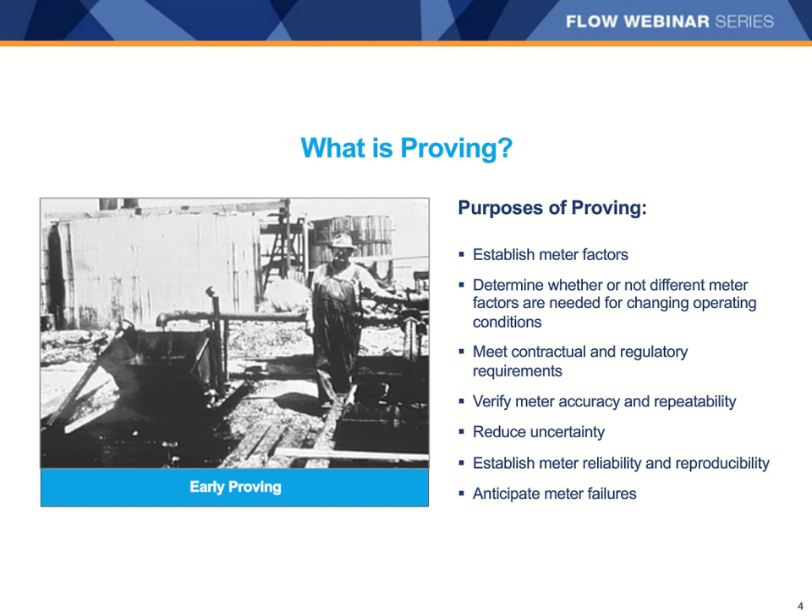Normally, financial risk is the main factor that decides how often proving must be done. Therefore, the value and quantity of the product that is flowing determines how often proving is done. In cases where the flow rate is high and/or the product is expensive, proving might be done before and after each and every transaction.

Take, for example, the estimates shown in the table that show 0.1% of measuring accuracy can be worth thousands of dollars per day. The table also shows it only takes 20 or 30 minutes for an amount of crude oil equal in value to the cost of a large Coriolis meter to flow through the meter.

In other applications where the value of the product measured is smaller, proving might be done less frequently, perhaps monthly, to avoid wearing out the prover too quickly. Some applications are scheduled to prove whenever a certain fixed amount of throughput has passed through the meter. Another factor that might impact this decision is the type of meter and whether it wears out quickly or not.

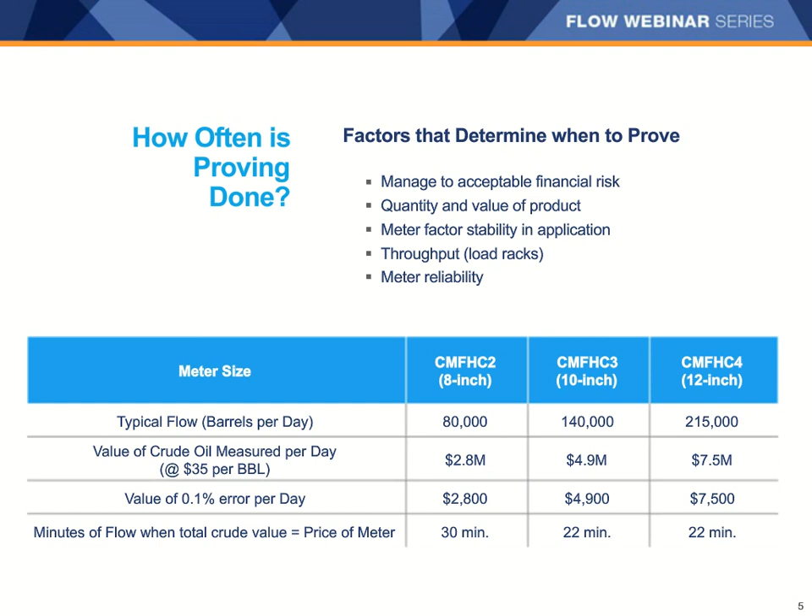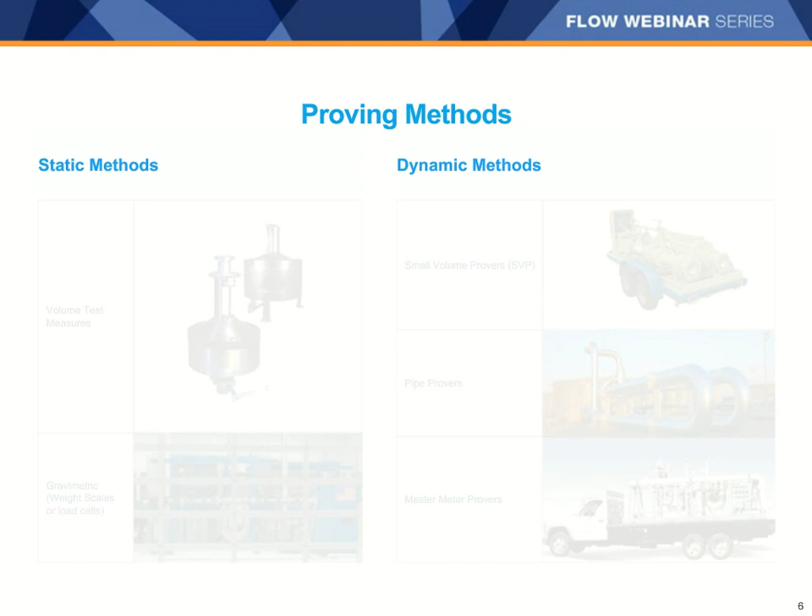So there are two main categories of provers in use today: static and dynamic. Static provers are characterized by filling up a tank with liquid to a point and then stopping to take a measurement while conditions are stable. This measurement can either be a volume measurement with a calibrated volume test measure or a mass measurement with a weigh scale or a load cell.

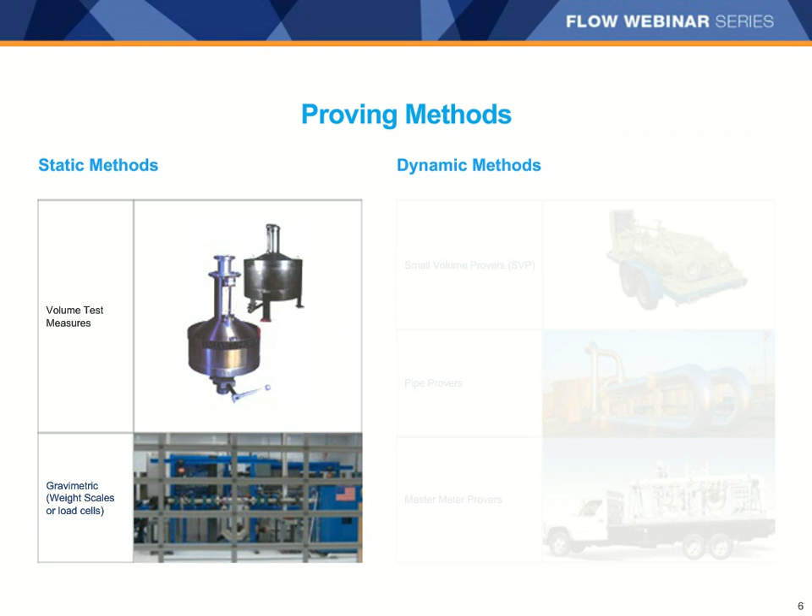Dynamic provers are far more common than static provers, and they tend to fall into one of three types: small volume provers, pipe provers, and master meter provers.

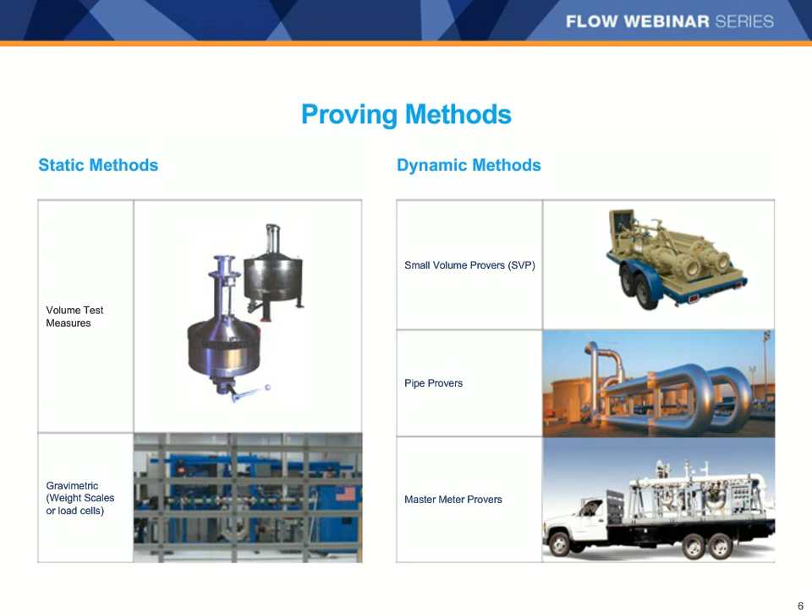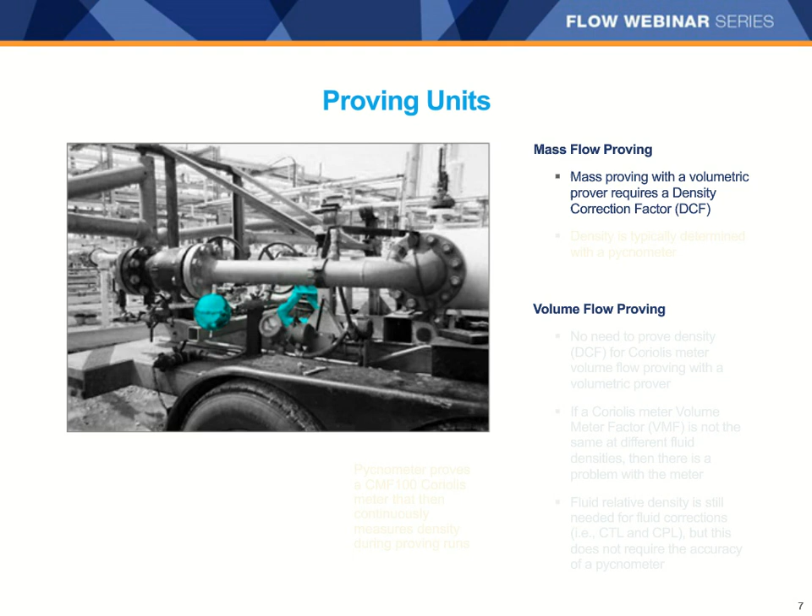Proving can be done in either mass flow units or volume flow units. To prove a meter that is measuring in mass flow units with a volumetric type prover, it is necessary to determine a precise density at the prover and a corresponding density correction factor so that the traceable reference volume of the prover can be converted into mass units to compare with the mass flow meter total and thus compute a mass flow meter factor. I'll explain what a meter factor is for those who are unfamiliar in just a bit.

The density correction factor for light hydrocarbons is usually determined using a pycnometer like the one shown below. A pycnometer is just a container that has a very carefully calibrated volume of space inside. To come up with the density correction factor, the pycnometer is filled with a fluid sample and then weighed on a scale. The tare weight of the empty pycnometer is subtracted from the measured weight of the full pycnometer to determine the weight of just the fluid sample.

Then, the weight of the fluid sample is divided by the calibrated volume of the pycnometer, and you have your fluid density. Because the pycnometer can only measure discrete samples, it is used to calibrate a very accurate density meter like a Coriolis meter shown in the picture. Then that density meter is used to measure the fluid density for all the proving runs that follow.

Coriolis meters can measure in either mass flow or volume flow units, so it is very common to find a Coriolis meter measuring in volume units. To measure in volume units with a Coriolis meter, there is no need for a pycnometer because a volume prover is used to directly determine the volume meter factor for the Coriolis meter, just like it would be for a positive displacement or a turbine meter.

In fact, the volume meter factor will remain the same for the Coriolis meter no matter how much the actual density of the fluid changes, unless there's something wrong with the Coriolis meter. If you see the volume meter factor for a Coriolis meter vary by more than normal statistics would predict, you should call a service agent to look at the Coriolis meter.

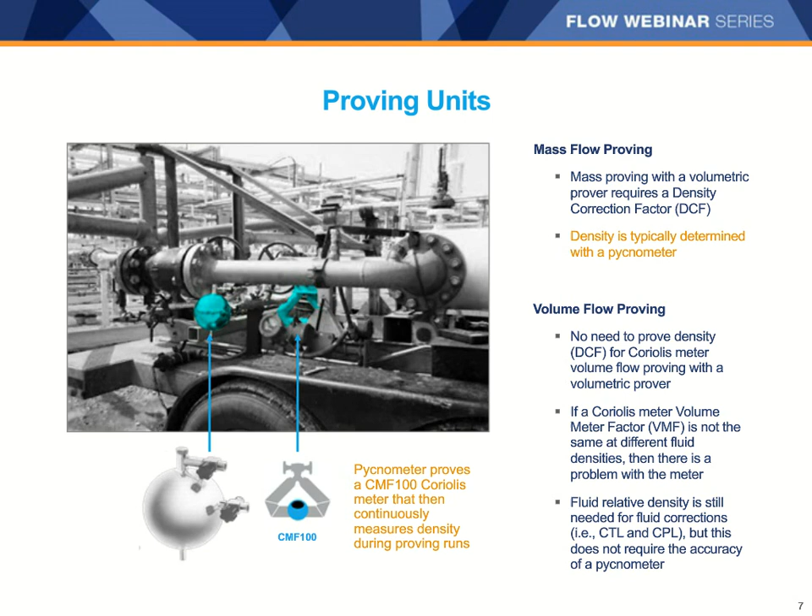When using a static volume test measure, it is important to keep careful records of the pressure and temperature of the fluid at the meter and the test measures so that proper adjustments can be made for expansion and contraction of both the fluid and the prover.

Operators of static volume provers must also be careful to account for fluid clingage to the inside walls. Initial wetting of the prover and careful timing of draining cycles is used to account for clingage, but this is one reason why static volume test measures are not used very often to test with highly viscous fluids that would cling to the inside walls for too long in between tests.

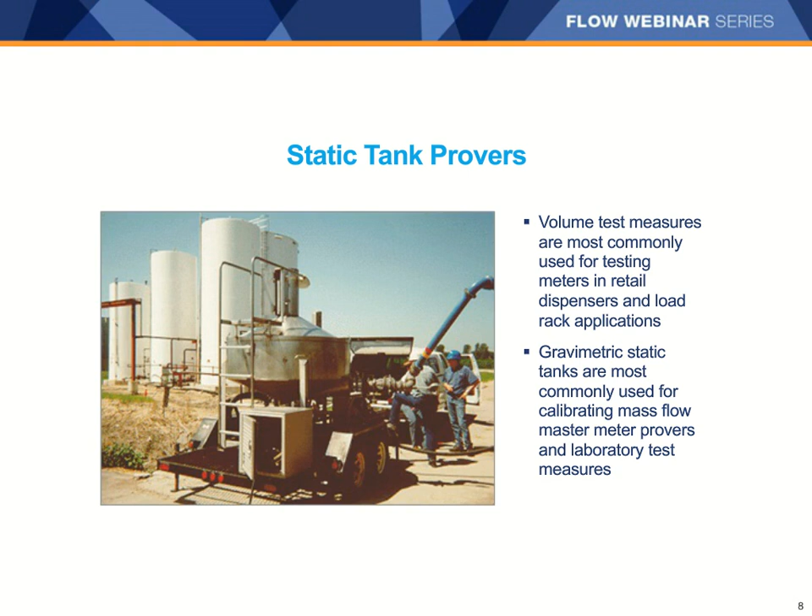A mass measurement with a tank on a weigh scale is called a gravimetric method, and it does not require any compensation for expansion and contraction of the fluid because the total mass of the fluid test quantity remains constant, even as temperature and pressure change.

Small volume provers are often called compact provers, piston-type provers, ballistic provers, or captive displacement provers. These provers consist of a short cylindrical chamber with a piston displacer that slides from one end to the other during a test. The total volume displaced as the piston travels between two detector switch locations is very accurately calibrated, and that volume serves as a reference standard.

The displacer has a poppet valve that allows flow to pass through the piston when it is not measuring a run, so that the displacer can be retracted and prepared for the next run. When the poppet valve closes, the piston must travel along with the flow and no fluid can pass by the displacer. Before any flow from the meter is counted, the piston must travel from the launch point to the location of the first detector switch. This is known as the pre-run.

As the piston continues past the first detector switch, the flow computer begins to count the pulses from the meter that represent the volume flow, and this continues until the displacer passes the second detector switch. At this point, the pulse counting stops, and the poppet valve opens so that flow can resume through the displacer as the piston stops and is retracted into position for the next run. The volume represented by the pulses that were counted is compared to the calibrated volume of the prover, and this is how the volume output of the meter is tested.

Some types of small volume provers have the ability to select the location of the detector switches so that the pre-run time can be made longer or shorter, by giving up some of the volume from the actual run.

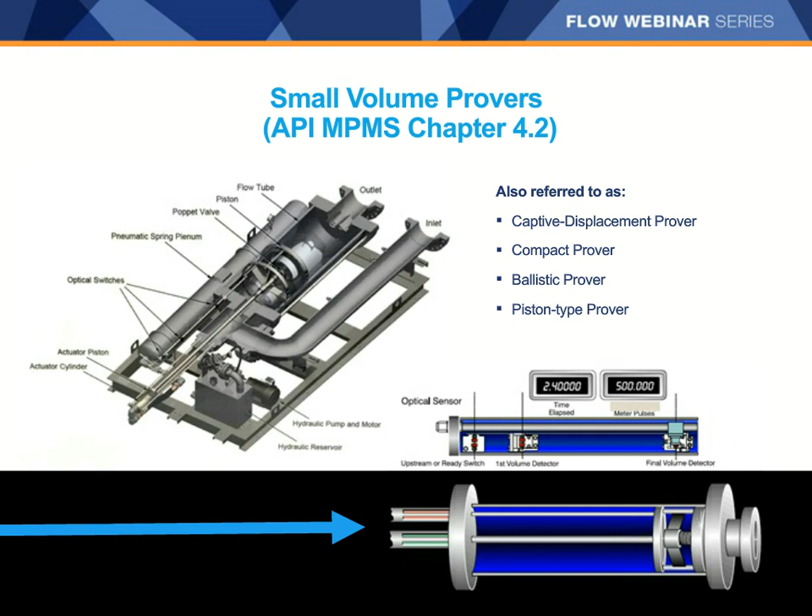A pipe prover, sometimes called a ball prover, is very similar to a small volume prover, except that the displacer is a sphere or a ball that slides through the pipe from one end to the other. The ball does not allow any fluid to pass, so just as with a small volume prover, the reference volume is measured when the displacer ball passes by two detector switch locations. The volume between those two locations is very carefully calibrated against higher reference standards.

If the ball is returned to the starting point through a bypass, then it's called a unidirectional prover. However, the pipe prover will often have a four-way valve, as shown in the diagram in the upper left corner, so that the flow through the prover can be reversed and the ball can be sent back and forth through the calibrated volume of the prover.

This very common method is called a bidirectional prover, and it is a simple way to return the ball to its starting point. Data is collected in both directions, and each run consists of the total volume of flow during both the forward and the backward trips of the ball.

The biggest difference between a small volume prover and a pipe prover is that the total reference volume inside a pipe prover is usually much more than the volume inside a small volume prover. Two consequences of this are that the pre-run time and the run time for a small volume prover are typically very short compared to a pipe prover, and a pipe prover generally occupies considerably more space than a small volume prover. Pipe provers can be designed to handle almost any flow rate just by changing the diameter and/or the length of the pipe.

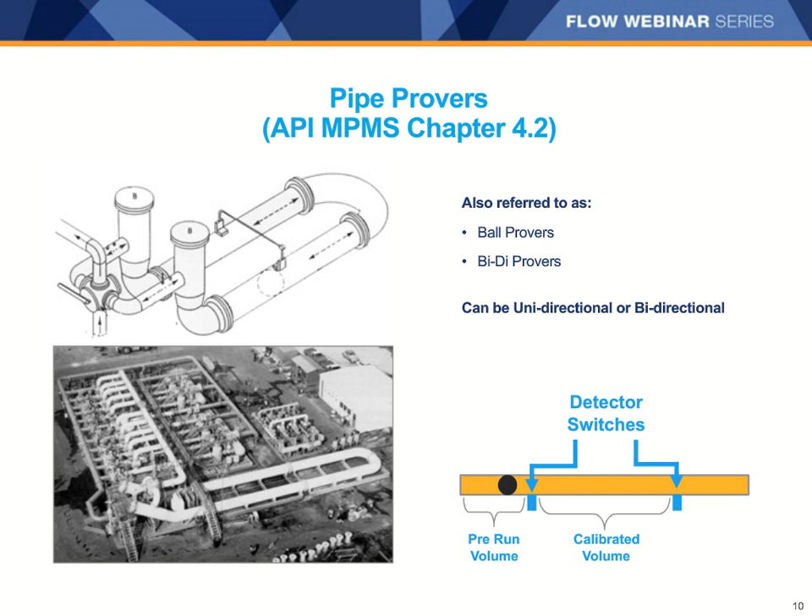A master meter prover is simply another flow meter that measures the reference standard volume or mass total. The requirements for master meter proving are well documented in the API MPMS Chapter 4.5. The master meter is trusted because it is checked frequently against a higher reference standard. There are two different types of master meter proving: direct and indirect.

In direct proving, not with a master meter, the prover is located either permanently or temporarily in series with the line meter as shown. All the flow that passes through the line meter is directed through the prover during proving.

In comparison, a direct master meter proving uses both a master meter and another type of prover that are located in series with the line meter, as shown in the second diagram. The prover checks the master meter and creates a master meter factor that is then used by the master meter to prove the line meter. This approach ensures that the master meter is always checked in the installation and on the process fluid at process conditions before it is used to prove the line meter.

The prover and the direct master meter may either be permanently located at the site or mobile. In indirect master meter proving, the master meter is located in series with the line meter, but there is no other prover at the location. Instead, the checking of the master meter against a prover is done in the indirect master meter method by periodically removing and sending the master meter to another location for checking, usually a laboratory.

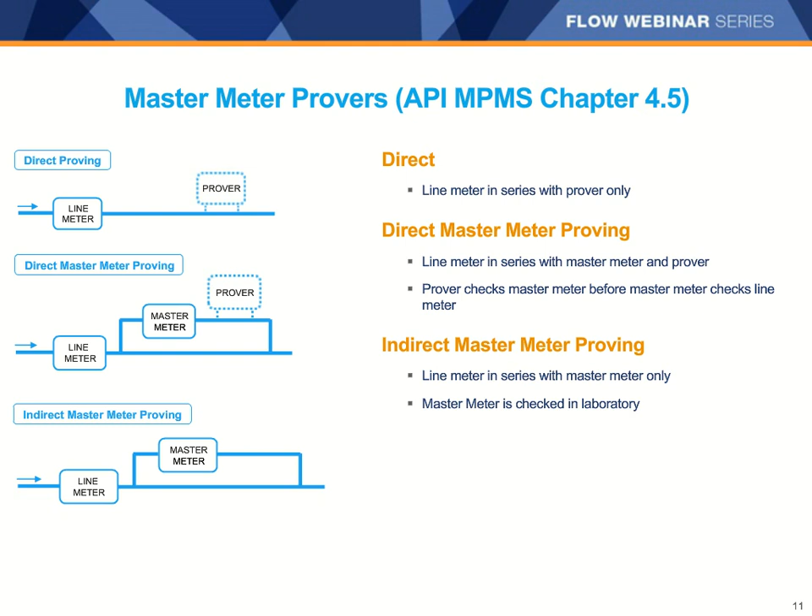One advantage of indirect master meter proving is that a Coriolis meter can prove another Coriolis meter in mass units without the need for a pycnometer, because both the line meter and the master meter are reading in mass units, and the master meter would have been checked against a gravimetric or other mass-based higher reference standard.

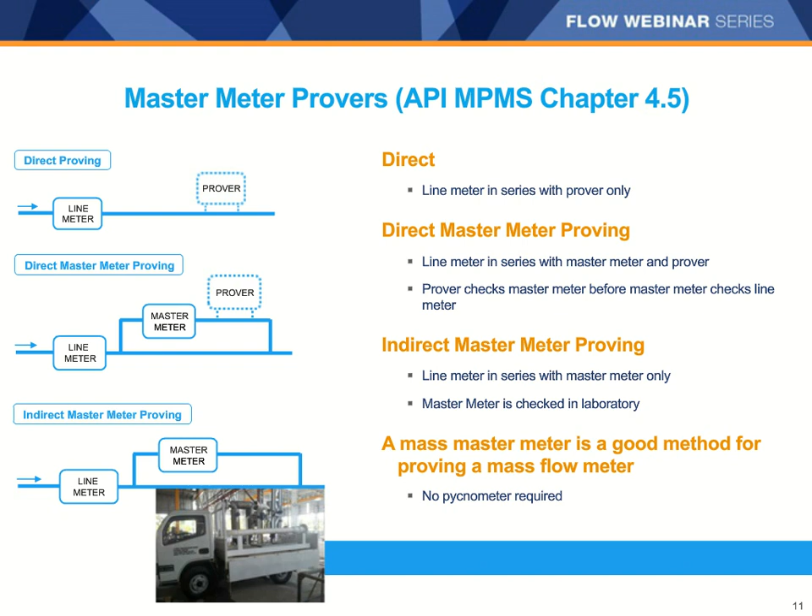Master meter provers have not always been considered very reliable, because they often use only PD and turbine mechanical meters that could wear and drift over time. For this reason, it has been critical to check PD and turbine master meters against a higher reference standard very frequently.

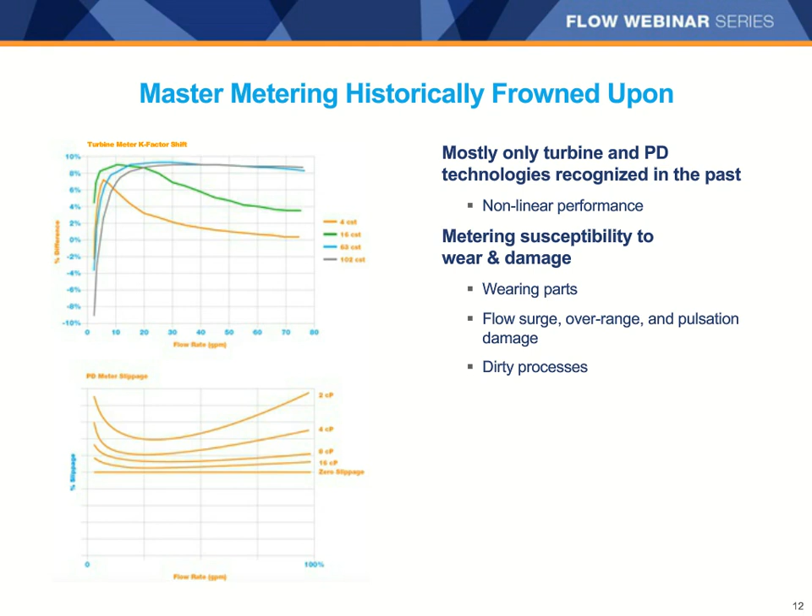Indirect master meter proving is also difficult with PD and turbine master meters because they can be affected by changes in the fluid properties and the process conditions.

However, master meters are growing in acceptance worldwide because Coriolis meters are able to perform very well as master meters with their design that has no moving parts and which does not drift over time.

One nice attribute of a Coriolis master meter prover is that it is possible to collect pulses from the line meter for as long as desired, because there is no fixed volume that limits the length of the proving run like there is with a small volume prover or a pipe prover.

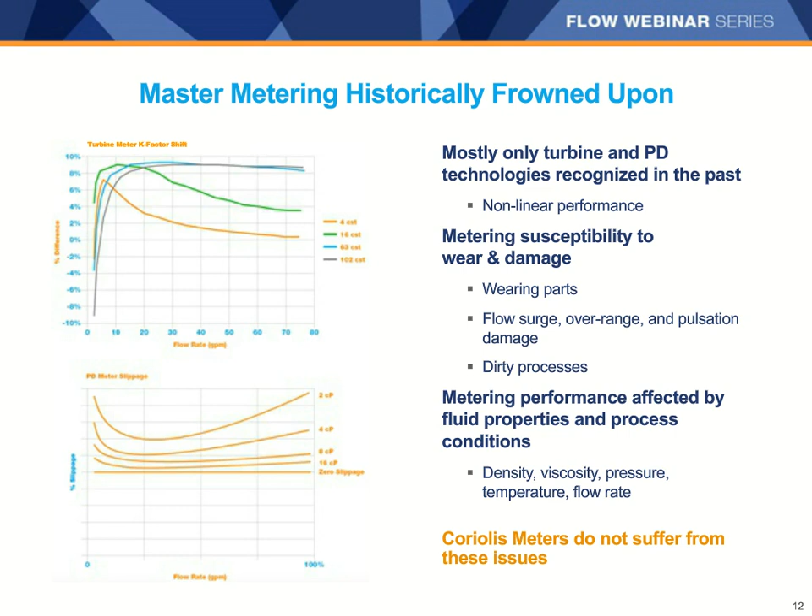The most important result of a successful proving is the meter factor. The meter factor is defined as the prover volume or mass total divided by the volume or mass total from the meter observed during a prover run.

After proving, future meter readings are multiplied by the meter factor to correct for the difference that was observed between the meter and the prover.

If the meter total was less than the prover total during proving, then the meter factor will be greater than 1, and future meter readings will be increased by the meter factor. In the case where the meter total was more than the prover total, the meter factor will be less than 1, and future meter readings will be decreased by the meter factor.

The main goal of proving is to determine meter factors with confidence. Two key attributes of proving data are analyzed to assess the meter factor uncertainty: meter factor repeatability and reproducibility.

Repeatability is a calculation of how much variation occurs between meter factors created during multiple proving runs conducted in quick succession and under stable conditions. As such, repeatability is a short-term measure that can be calculated immediately each time a meter is proved.

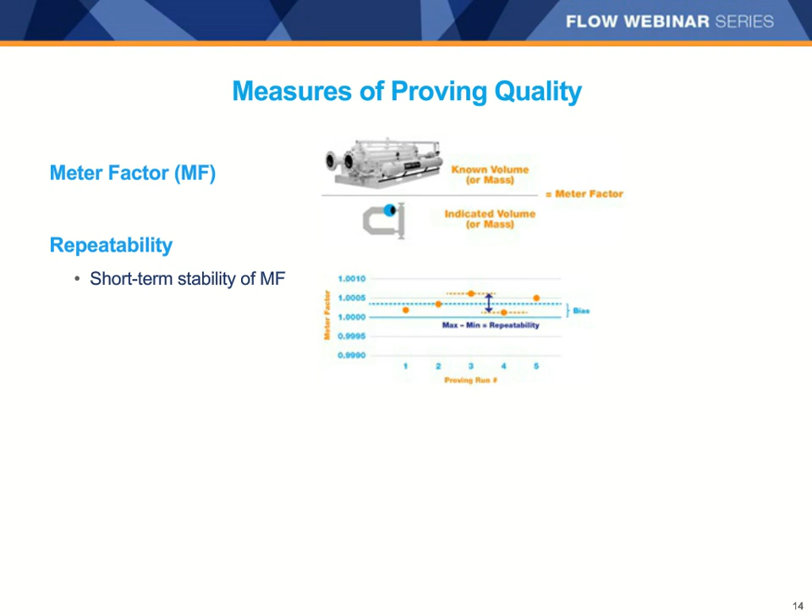One very common way to estimate repeatability is to calculate the range between the highest and lowest meter factors from a set of proving runs. The repeatability calculated this way is compared to a tolerance that is explained in API MPMS Chapter 4.8.

The tolerance that applies to determine whether a set of proving data passes or fails repeatability requirements increases as the number of runs in the data set increases. This relationship between the repeatability tolerance and the number of runs is determined statistically to always assure a maximum uncertainty in the meter factor of 0.00027, or 0.027%, regardless of how many runs are taken.

Reproducibility is a little different from repeatability in that it is a measure of the long-term stability of the meter factor, found by observing changes in the meter factors from many provings taken over a long period of time.

Reproducibility is used to determine how stable a meter's accuracy is over time and when flow rate and other fluid conditions are changing. Meter factor reproducibility is also used to detect when a mechanical meter is wearing out and might be about ready to fail.

One of the main reasons Coriolis meters are becoming so popular in proving applications is because they typically have very long-term meter factor reproducibility.

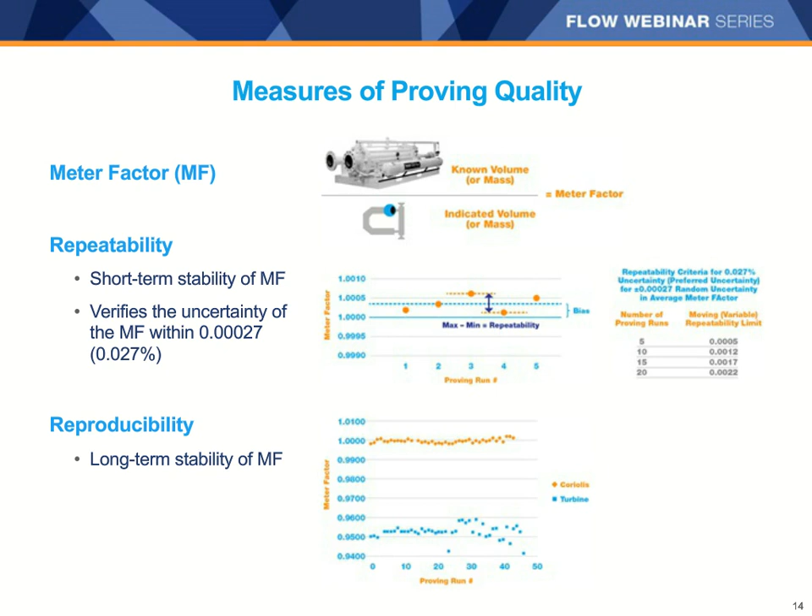It's easier to visualize the real advantage of the long-term stability and reproducibility of a Coriolis meter by comparing it to the typical behavior of a turbine meter as flow rate and viscosity change over time.

If the flow rate becomes lower, it would be common for the turbine meter to have a lower meter factor. The Coriolis meter factors, however, should not change as the flow rate changes because Coriolis meters are linear with flow rate. Similarly, if the flow rate is higher, the turbine meter factors might be higher, but the Coriolis meter factors, again, will remain constant.

If the fluid viscosity changes, the difference in the meter factors for the turbine meter becomes even more pronounced, when the Coriolis meter factors continue to remain constant because viscosity has little or no effect on the Coriolis meter.

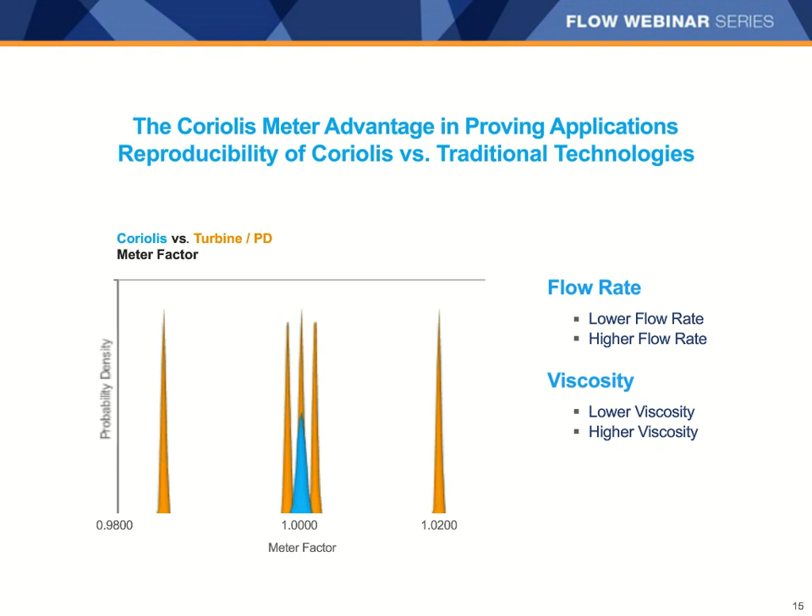Several important challenges must be considered when designing and operating a measurement system that includes a prover and a meter. One major concern is managing the cost. Provers can be rather expensive, especially as the size of the prover increases.

Small volume provers may be advantageous because they typically take up less space than a pipe prover and are often more portable. The smaller a prover is, the less it will typically cost. However, it's not unusual for a small volume prover and a pipe prover of similar size to be reasonably close in cost, so it is important to research and compare prices.

Maintenance of provers is another factor to consider. The moving parts and seals inside a small volume prover must be maintained, and the valves, sphere, and switches in a pipe prover must also be carefully maintained to avoid problems.

The cost of operating a measurement system will also depend on how easily the proving is completed. If proving passes the first time every time, this can save operating costs compared to a meter and prover combination that has chronic difficulty in passing proving repeatability and reproducibility requirements. Much will depend on overall performance of the proving system in terms of this last point about proving efficiency.

The pulse stability of the meter can have an impact on repeatability, especially for a small volume prover and for meters with low K factors, such that pulse interpolation is necessary to achieve acceptable uncertainty.

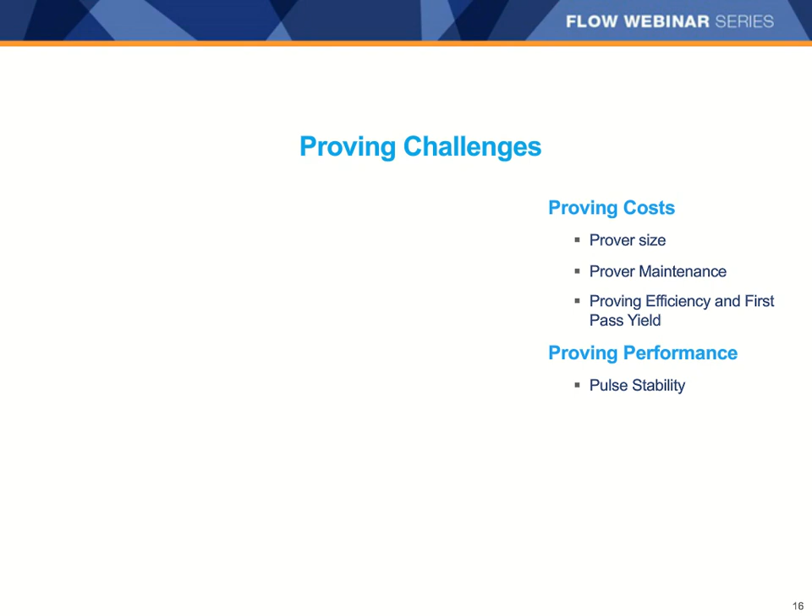The stability of the conditions, that is to say, flow rate, density, pressure, and temperature, is very important and can adversely affect repeatability if they vary too much, especially if run times are very short. Maintaining stable conditions can be a challenge.

For example, flow rate variation is very frequently caused by closing the poppet valve in a small volume prover. Before the poppet valve is closed, flow has to pass through the gap of the open valve, and this induces pressure loss, which in turn impedes the flow rate a bit.

As soon as the poppet valve closes and the piston starts moving with the flow, the resistance of this pressure loss goes away, and it is replaced instead by the resistance of the piston movement and the friction of the seals between the displacer and the chamber.

The response time of the flow meter is also important to repeatability when the runtime is short. If the meter cannot respond quickly enough to changes that occur during the proving process, the meter factors might vary from one run to the next enough to cause a repeatability failure.

Some proving systems have the flexibility to allow a different number of runs to be collected during proving. This flexibility gives operators an option to start by taking a minimal number of runs, say 5, and then either continue to collect more runs if needed or stop if the repeatability has passed. Often the ability to add more runs will increase the tolerance enough to allow a meter that first failed with 5 runs to then pass with 10 runs.

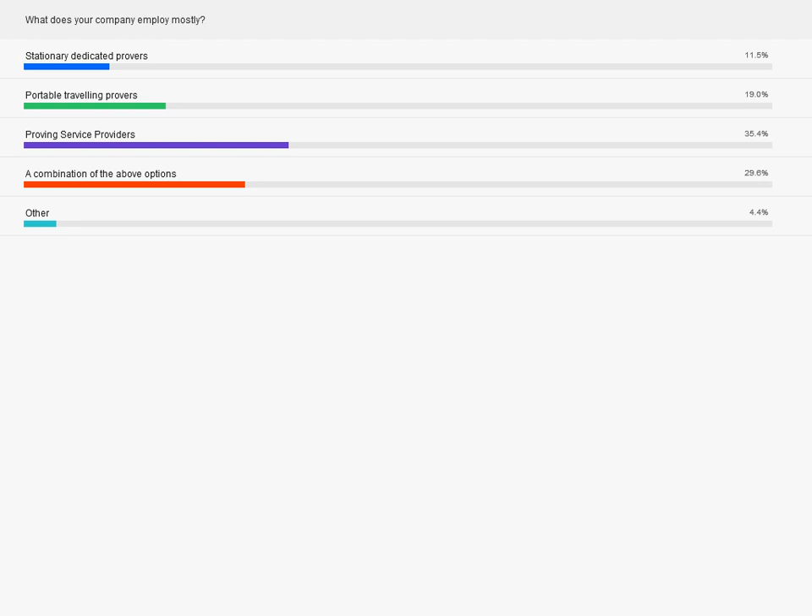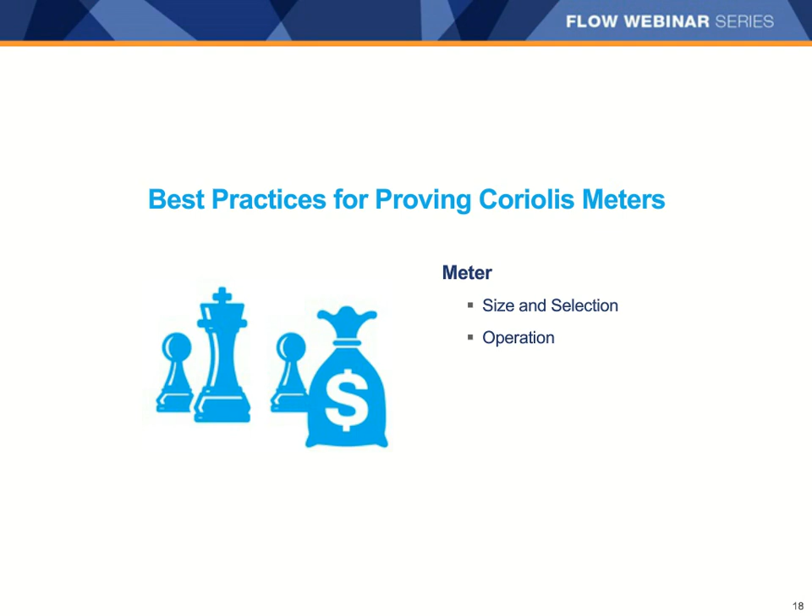Now it's time to cover the best practices for proving Coriolis meters. To do this, we'll go over how to select the right meter size and then discuss some of the things you can do to operate the meter in a way that is likely to make proving go smoothly.

Next, we'll cover considerations on how to choose the right size prover and how to operate that prover for best results. Lastly, we'll take a look at piping design and other details that can help improve the overall performance of the system.

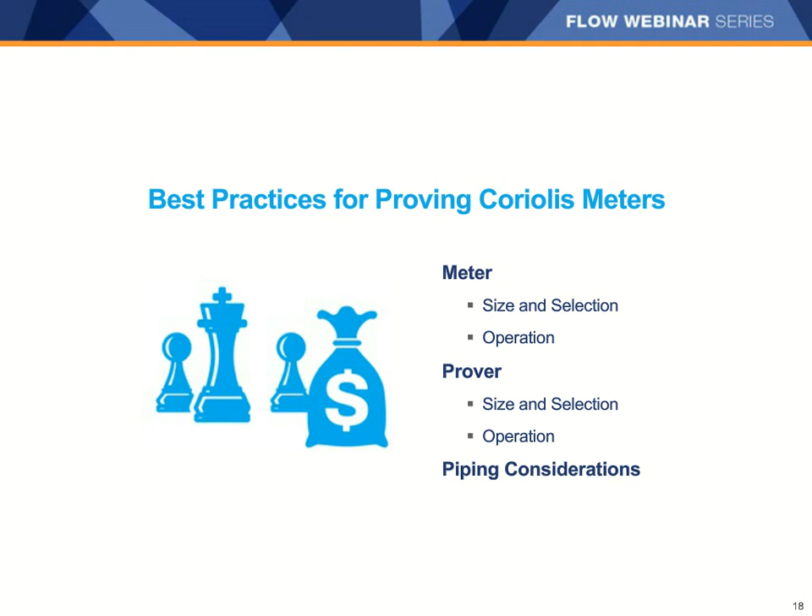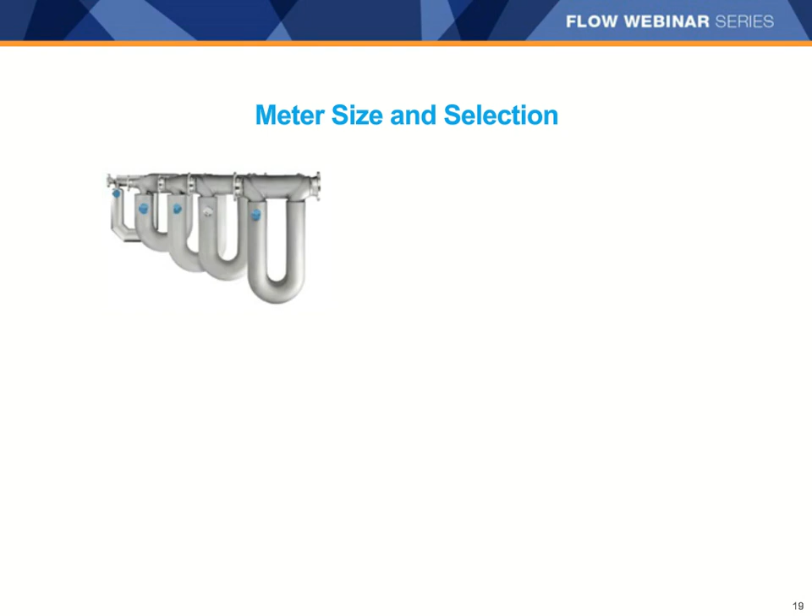So to choose the best size Coriolis meter for a proving application, you should pay close attention to the maximum flow rate and the minimum flow rate. The maximum flow rate for a proving application is best kept below the flow rate that will result in a fluid velocity of 60 feet per second, or 18 meters per second, as the flow passes through the flow meter tubes.

Micro Motion has software sizing tools available online that are used to select the best flow meter size, and one of the parameters reported is the velocity of the fluid passing through the flow tubes. So for proving applications, it is a best practice to check this value and make sure it does not exceed 60 feet per second.

These same sizing tools will also provide the zero stability number for any size meter. The zero stability number can also be found in the product data sheet posted on the micromotion.com website. It's another best practice, to assure good repeatability, to make sure that the meter size selected is small enough such that the zero stability will always be smaller than 0.06% of the lowest proving flow rate.

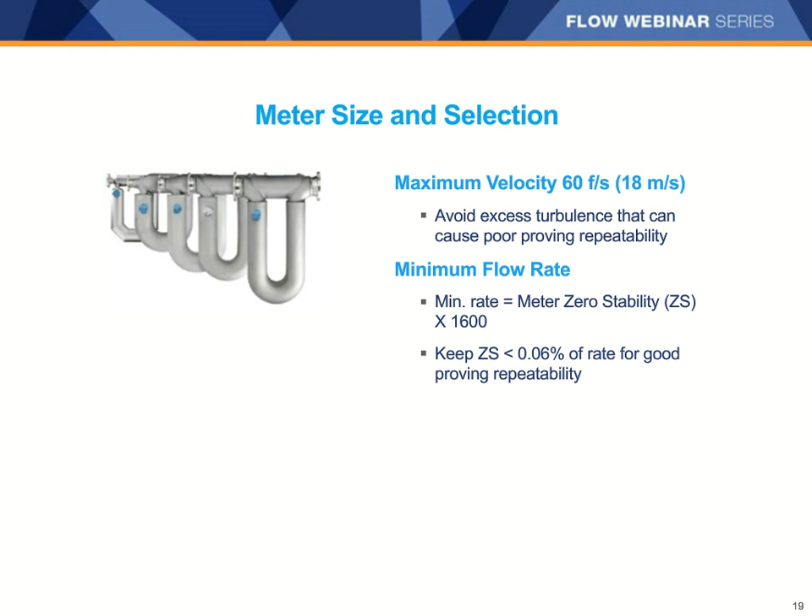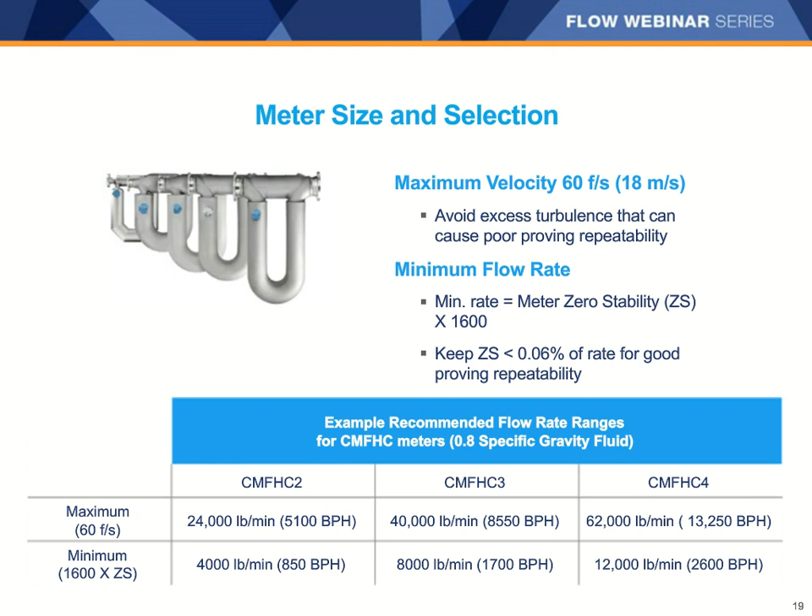Now let's discuss best practices for meter operation.

The meter response time settings should be set for the fastest response possible. This is done slightly differently for different model transmitters, so it's important to consult the instruction manuals for specific details for each model. However, for all models, flow damping should be set to 0.08 seconds, and density damping should be set to 0.16 seconds.

The meter zero can be important in proving applications at low flow rates. In order to judge correctly whether or not to calibrate the meter zero, you should always first use the meter zero verification diagnostic tool. This tool will tell you if the meter zero is already good or if it needs to be calibrated. All meters are zeroed before leaving the factory, so it is more than likely that the meter zero is good right out of the box and may never need to be calibrated by you.

If the meter zero is calibrated, the meter should be proved.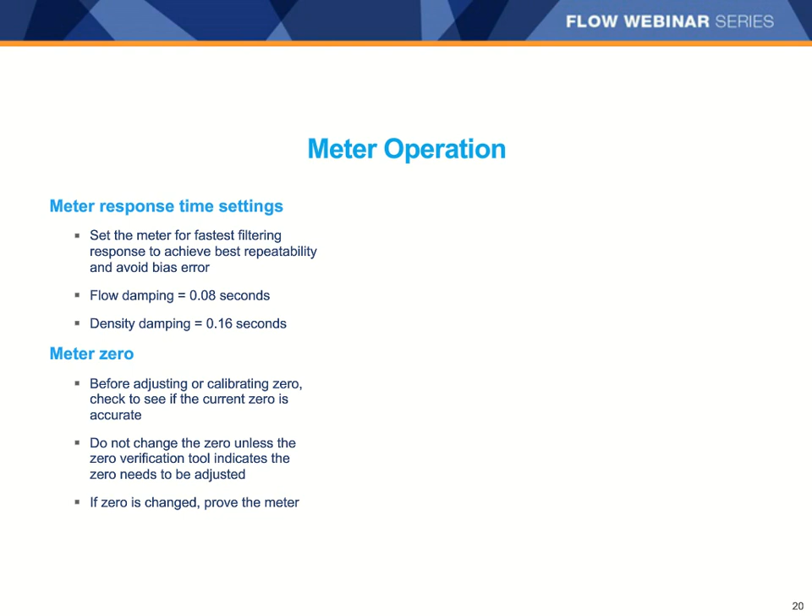Some larger meters have a published pressure compensation value and the capability to automatically correct for the effect of pressure changes on the meter. These compensations are generally very small, but they can improve repeatability and reproducibility, so it is recommended that if this feature is enabled on meters that have an effect, it should remain enabled. Consult with the instruction manuals and the product data sheets for more details and to find out which meters are affected and which ones are not.

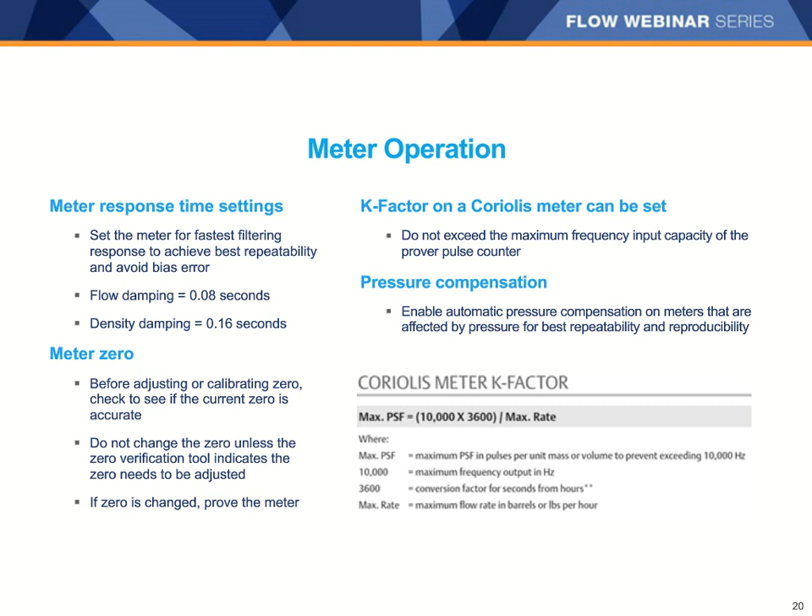One reason the response time settings are important in proving applications is because the flow signal can be noisy. Noisy flow can be caused by many things, including an overinflated proving sphere or a poor seal on a small volume prover piston.

Regardless of the source of noisy flow, if the prover is sized so that the runtime is very short, on the order of 2 seconds or less, it is important in order to consistently pass repeatability requirements that the meter response be fast enough to keep up with the actual flow variation, but not too fast such that the meter response makes the flow output noisier than the true flow really is.

One theory about why PD and turbine meters do not usually experience poor repeatability in noisy flow conditions is based on a concept referred to as inertial damping. Simply stated, the inertia of the mass of the rotating parts inside the meter prevents the meter from being disturbed by noisy flow.

The best practice for a Coriolis meter is to ensure good repeatability by selecting a large enough prover to keep the runtime long enough to average out the short-term variation of noisy flow. We will talk more about how to choose that size of prover to achieve this in just a couple of minutes.

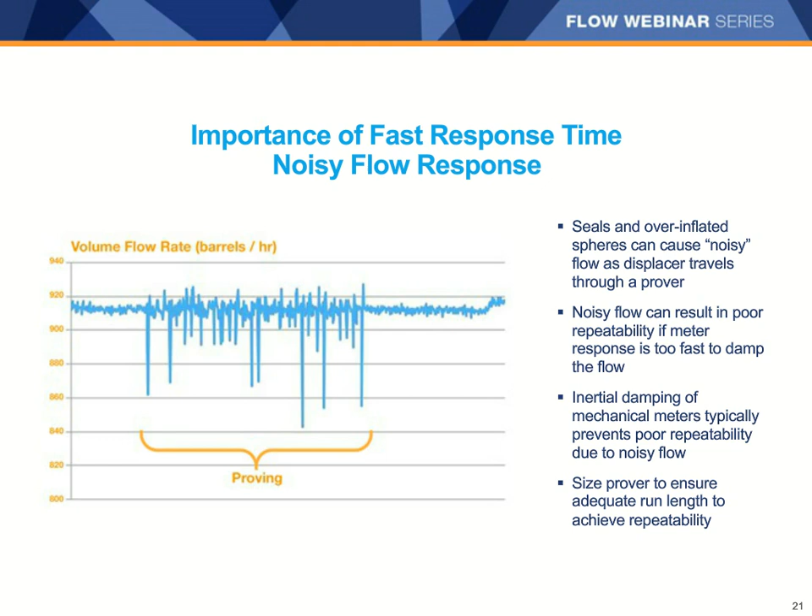But first, as we discussed earlier, it is often the case that there is a step change in the flow rate that coincides with the launch of the displacer. As with noisy flow, it's very important for the meter to have fast response so that the meter has caught up with the change in flow rate before the end of the pre-run.

Similarly, if the flow rate drops during the run, the meter might over-indicate total flow if it doesn't fully catch up with the drop before the first detector switch is passed.

It is even possible that the meter might miss the same amount of flow for each run closely enough to pass repeatability. The potential of this risk is that it might result in a small bias error in the meter factor that goes undetected by the repeatability check.

Fortunately, a Coriolis meter can help guard against this scenario in two ways.

First, because a Coriolis meter has adjustable settings to select the response time of the meter, it is possible to set the meter for fast response and avoid any missing flow from the step change.

Second, it is possible to verify that the fast response setting has been successful by comparing the meter factor at different proving flow rates. In the case where the step change in true flow rate increases, if the meter is not responding fast enough, the meter factor will become higher and higher as the flow rate increases, because the meter will be missing more and more flow at higher and higher flow rates. If the meter factor remains stable as the flow rate increases, it is a good sign that the response time is fast enough to avoid the missing flow of a step change increase.

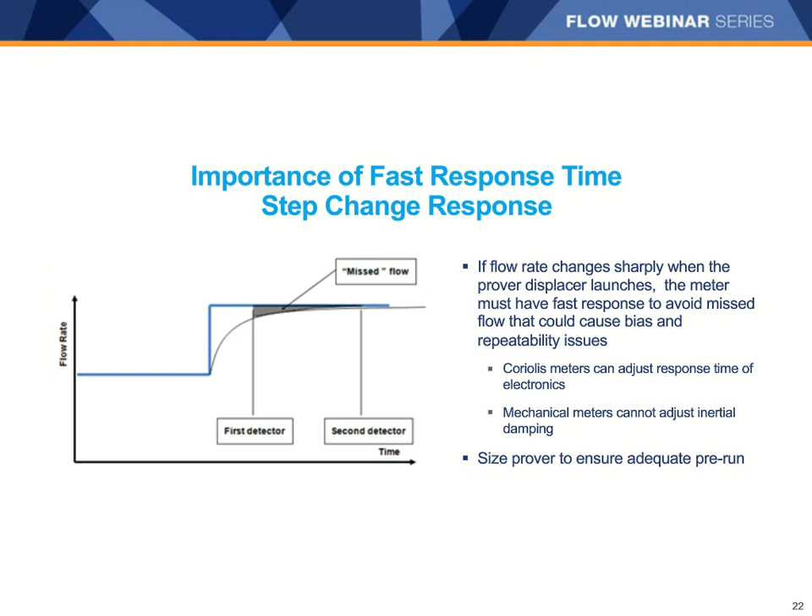Micro Motion meter diagnostics include a feature called Smart Meter Verification, or SMV. The SMV diagnostic tool allows you to check for the health and accuracy of the meter in place.

And it could not be easier, because it does not require you to do anything before running the test. You don't need to interrupt the flow or control any process conditions. The flow measurement from the meter itself is not even interrupted by this process.

SMV is a powerful troubleshooting tool that also allows you to do frequent testing in between proving while your system continues to run. It improves safety and reduces travel time by allowing you to troubleshoot without having to send someone into the field. And once SMV has been purchased and installed as part of the meter, there are no additional costs to run a test, so you can run as many tests as you want, as often as you want, without incurring additional cost.

I should pause here and remind everyone that Coriolis meters are extremely unlikely to be damaged or change or drift in service, so the expected results of the SMV test are almost always going to pass with no trouble found.

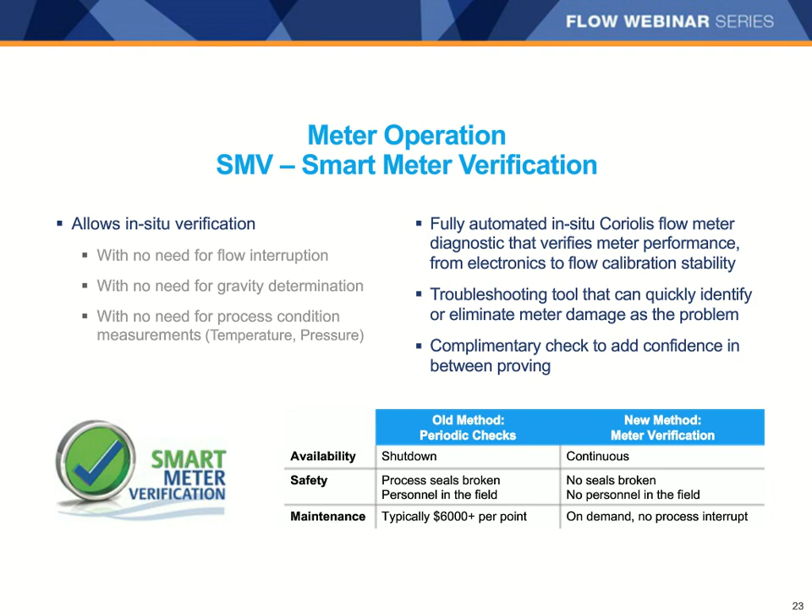The longer the prover run time is, the better the repeatability is likely to be. One other consideration is to ensure that the prover size is large enough to prevent cavitation inside the prover. The vapor pressure of your fluid and the velocity and pressure drop through the poppet valve will be the factors most likely to help you estimate the risk of cavitation inside the prover.

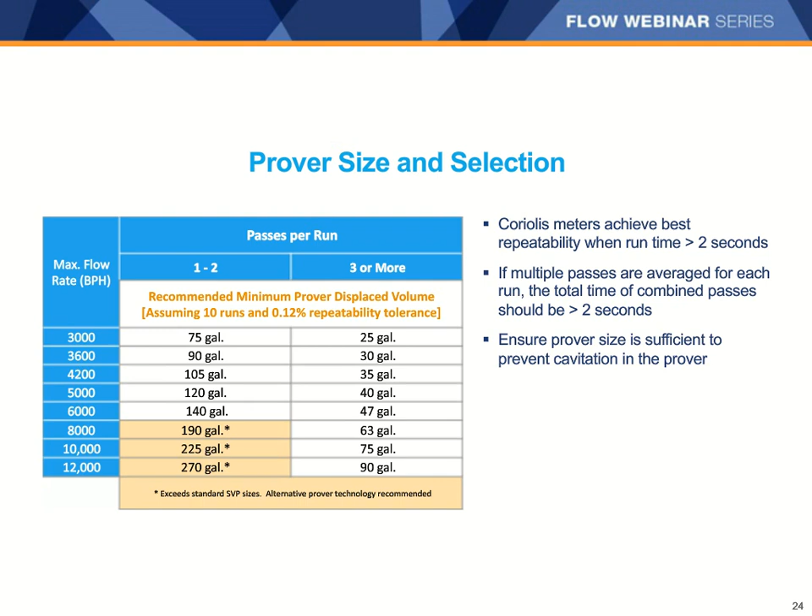In order to ensure the best chances for passing repeatability when proving a Coriolis meter, one of the most important areas to focus on when operating and maintaining the prover is how to maintain a stable flow rate.

Good maintenance on the prover, including internal seals and attention to the proper inflation of pipe prover spheres and plenum pressure, will help ensure smooth flow through the prover during proving runs. It is important to ensure that back pressure is sufficient to prevent cavitation in the prover, but especially just before the launch of the displacer. If the prover is located where extreme weather conditions may exist, insulating the prover can improve meter factor reproducibility.

If the prover has selectable detector switch locations that allow you to increase or decrease the runtime and the pre-run, we recommend a setting that maximizes the runtime. Results seen in field testing we have done are generally more positively impacted by longer run times than they are by longer pre-run times.

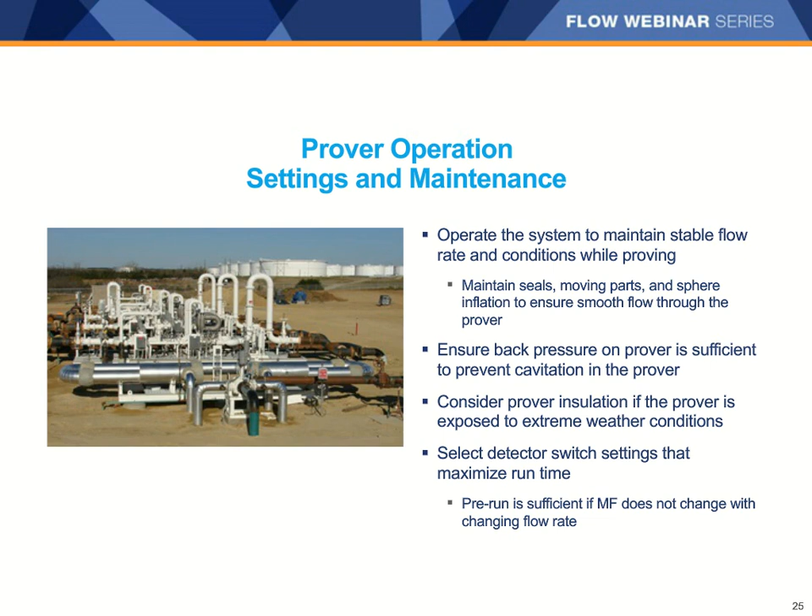As mentioned earlier, it is possible to verify that the pre-run time is long enough by proving at different flow rates and observing to see if the meter factor changes significantly. If no significant change is observed, then the pre-run time appears to be long enough. If you observe a significant change, then increasing the pre-run time should help.

There are some decisions that can be made according to API MPMS Chapter 13.2, which have the potential for improving repeatability. Calculating the standard deviation instead of using the range between the highest and lowest meter factors to measure repeatability is more accurate and less susceptible to repeatability failures caused by any single flyer meter factors.

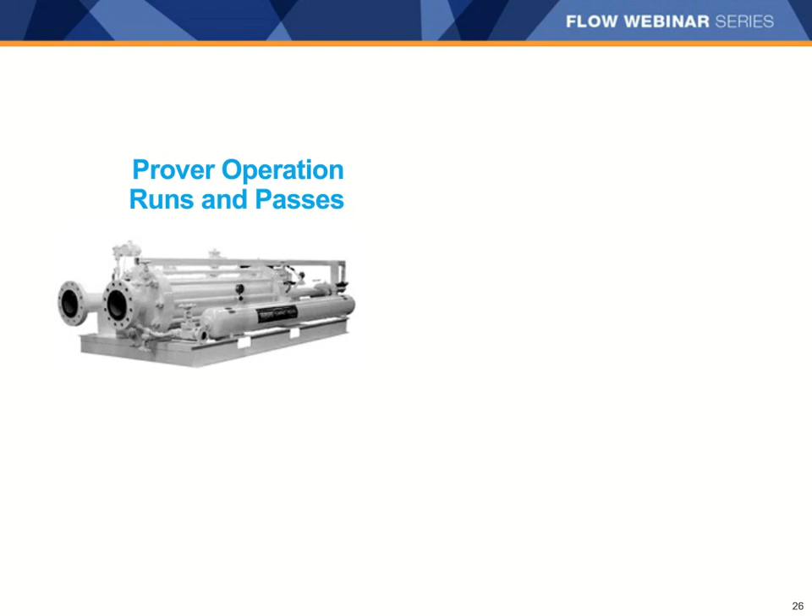Averaging multiple passes per run also helps to reduce the uncertainty of the repeatability measurement that can be caused by a combination of noisy flow, short run time, and fast meter response. We recommend 3 passes per run when using a small volume prover at flow rates that result in a run flight time of 5 seconds or less.

When using the range between the highest and lowest meter factor to estimate repeatability, more runs will allow a larger tolerance. For that reason, we recommend starting with 5 runs and a 0.05% repeatability tolerance. If the proving does not pass, we recommend increasing the number of runs to 10, which increases the repeatability tolerance to 0.12%. Increasing the number of runs and the repeatability tolerance does not diminish the confidence in the meter factor. Instead, it reduces the uncertainty of the estimate of the true statistical repeatability.

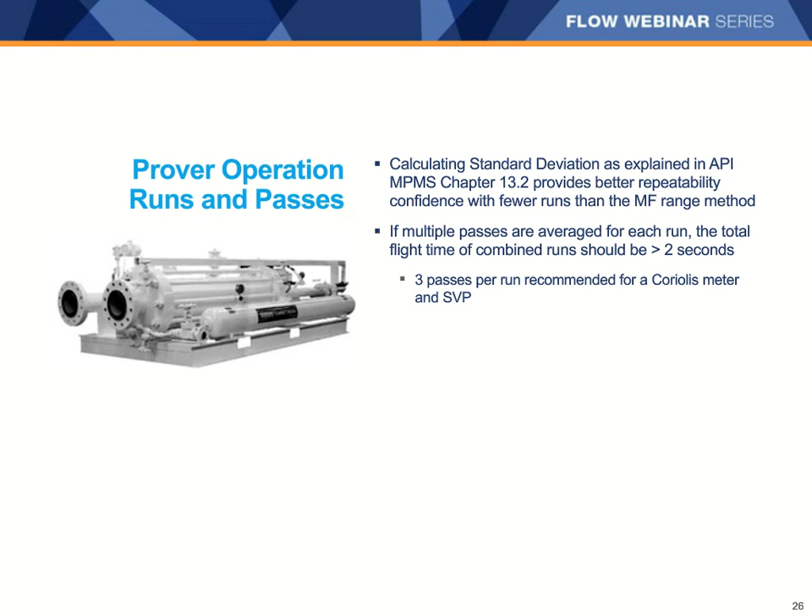The piping between the meter and the prover should be designed to help maintain stable conditions and flow rates while proving. This is true because one of the fundamental assumptions underlying the concept of proving is that the exact same quantity of fluid passes through both the meter and the prover simultaneously.

One precaution that can help ensure this is true is to make the distance between the meter and the prover as small as possible. Furthermore, valve locations and piping paths should be designed with an eye on avoiding long dead-end branches in the piping between the meter and the prover, where vapor pockets can be trapped or compressible fluids can be squeezed, creating a volume spring that allows for a total liquid volume contained in the piping to change.

The back pressure on the entire system should be high enough to prevent any cavitation anywhere in the system, including in the meter. All associated prover equipment, like temperature and pressure transmitters, need to be kept in good working order with up-to-date calibration documentation.

When a pycnometer or density meter is used to prove inferred mass units, it is very important for the pycnometer or meter to be located close enough to the prover so that the pressure and temperature in the pycnometer are the same as the pressure and temperature in the prover when proving runs are taking place.

Finally, it is essential to ensure that all valves that are intended to be shut are actually fully sealed with no potential for leaks.

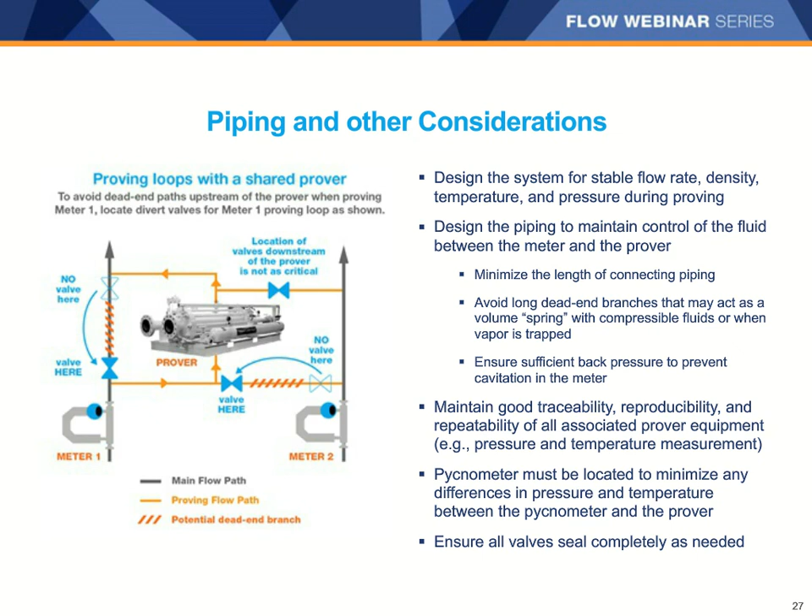To conclude, I would just say that the best practices we have shared today are intended to help you achieve the best possible proving results with the least amount of trouble and cost when proving Coriolis meters. Our intent is that you will find that with these, you can use Coriolis meters in more applications and with greater confidence than ever before.

The benefits of successfully installing and operating Micro Motion Coriolis meters in a custody transfer application begin with the long-term stability of the meter factor. When the meter factor is stable, everything becomes easier, and so it is worthwhile to learn how to pass short-term repeatability requirements with ease so that you can then move on to enjoying the real long-term benefits of maintenance-free operation and constant stability that a Micro Motion Coriolis meter will deliver.